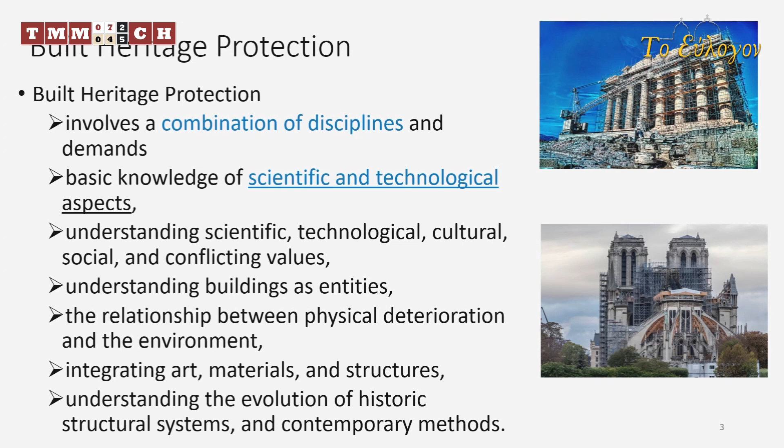Speaking about principles, I'm not going to present the whole Charter of Athens and Venice and its evolution, but one has to point out the importance of compatibility, which concerns not only the materials with the existing ones, but as well the structure itself, and has a lot of parameters, and reverse engineering to performative materials.

So we learn from what we find, and then we design materials and interventions that are compatible. We need to evaluate the restoration materials' compatibility, but not only compatibility, but as well as their durability and longevity.

Another point much discussed in our work is the principle of reversibility, used very much in the past. Now, after many years, the tendency is that this term is completed by another term, which is retreatability. This means that when an intervention or material is not possible to be reversible, it has to be compatible in such a way that it will permit future generations to retreat the surface or the structure—reinterventionality, as Professor Tassios says.

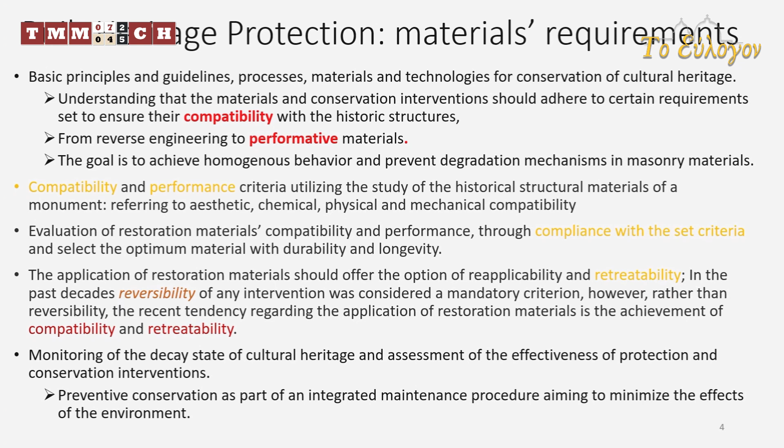Another point is the monitoring of the decay state of cultural heritage and the assessment of the effectiveness of interventions. We must not only apply interventions as materials, but judge them in the future and try to understand if finally they were good or not. And of course preventive conservation is very important in order to avoid important damage.

There is an open discussion about cultural materials and climate change, as we all know. I will not go through all the points Professor Maravelaki has noted, but we need to take this matter into account and make specific studies in various sites, because they are not the same—the situation with climate change in Peloponnese or North Greece or other countries differs. It's important to have data, and on the basis of this monitoring system data, to make workshops and training, making not only professionals but as well the public aware of this problem, which is a real problem for the monuments.

There is as well the question of artificial intelligence—there was a session this morning on this, which concerns restoration and conservation of monuments, because a lot of help can be given by this approach regarding image recognition and pattern detection. It may assist experts in preserving sensitive artworks and archaeological items, and contributes to the protection of cultural heritage sites by addressing physical effects through environmental monitoring.

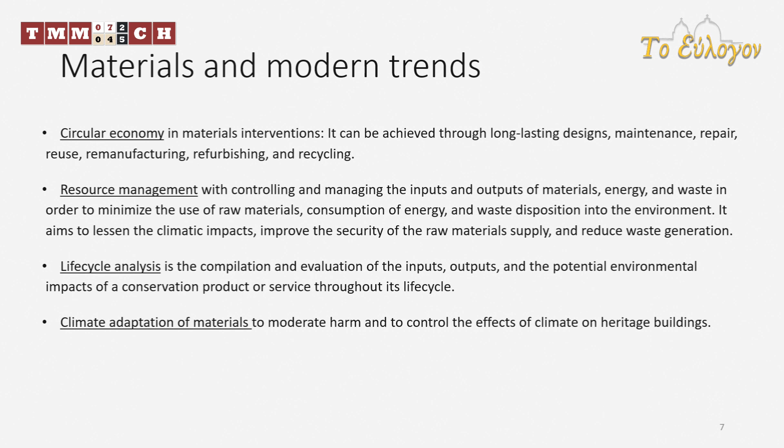For future work, we have some proposals from Noni Maravelaki: integrating new artificial intelligence systems developed in research projects into existing systems, publicly sharing and generalizing models trained on cultural heritage collections, implementing artificial intelligence in a way that is considerate of ethical, legal, and social aspects, reducing the carbon footprint of training models and processing at scale. I would like to add to these proposals that we also have to try to prepare in a way that will reach all the professionals with the knowledge we already gained.

So we need some regulatory documents, both regarding materials, because we know a lot of things, and regarding the structures as well. And finally, as we embark on this transformative journey, it is crucial to continue fostering interdisciplinary collaborations and community engagement to ensure the effective and responsible preservation of our shared cultural heritage. Thank you.

So we will discuss protective coatings and the desired general properties of protective coatings. Protective coatings must produce hydrophobicity, breathing of the substrate, resistance to environmental factors, preservation of protective properties, no alteration of the optical properties of the stone. The application of the coating should be a reversible process, and it must be compatible.

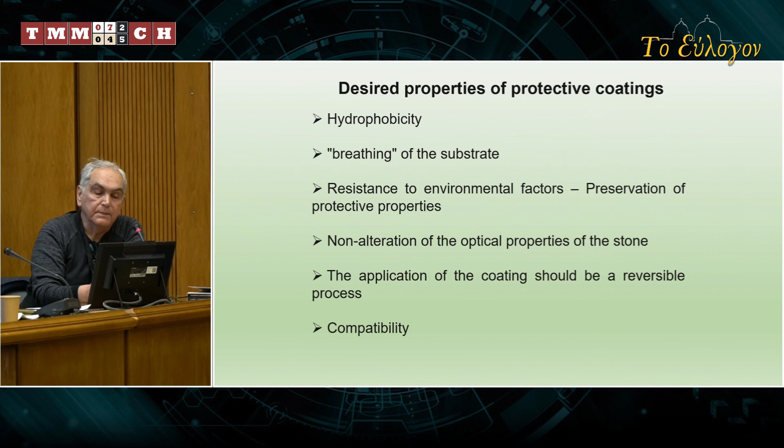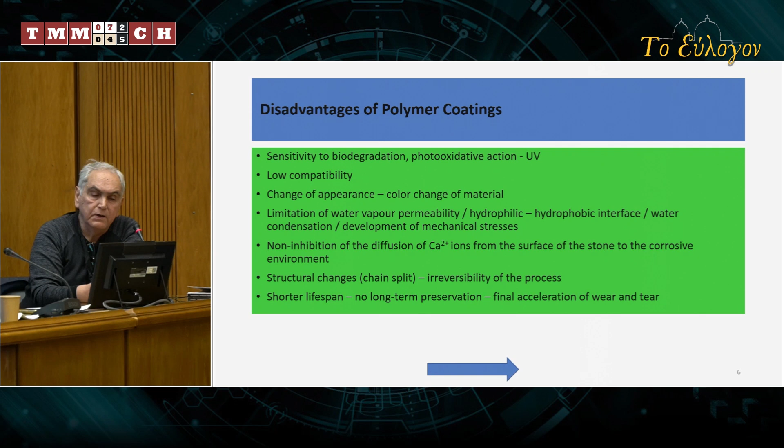Starting with polymeric coatings - the disadvantages of polymeric coatings include sensitivity to biodegradation, photooxidation from UV action, low compatibility, change of appearance and color change of material, limitation of water vapor permeability, a hydrophilic-hydrophobic interface causing water condensation, and development of mechanical stresses. There's no inhibition of the diffusion of calcium ions from the surface of the stone to the corrosive environment, structural changes, irreversibility of the process, shorter lifespan, no long-term preservation, and final acceleration of wear and tear.

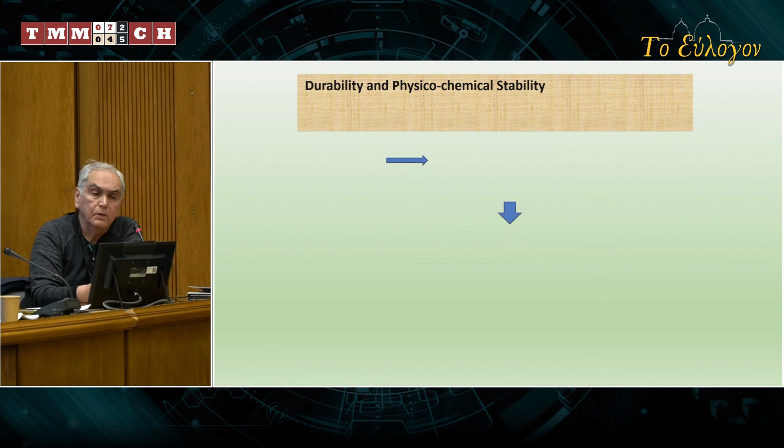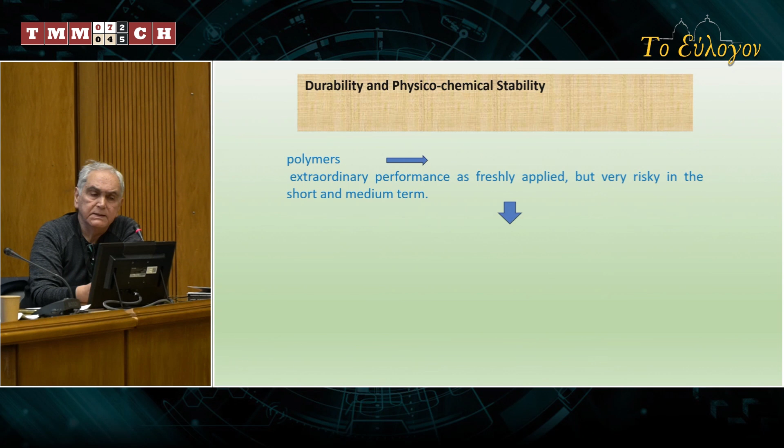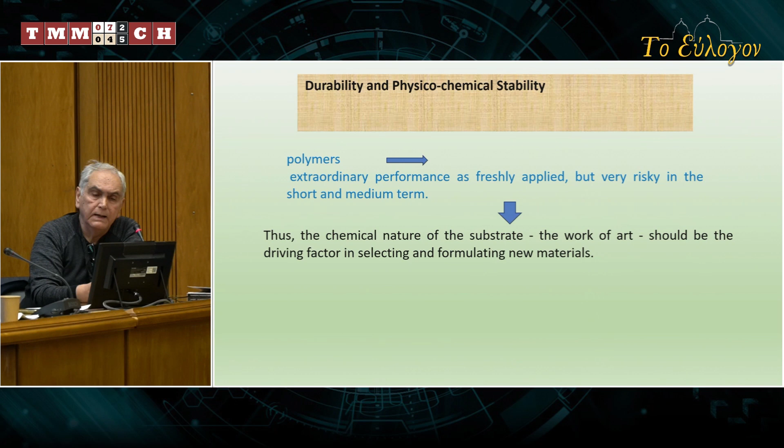Now we go on with durability and physicochemical stability. Polymers show extraordinary performance when freshly applied, but are very risky in the short and medium term. Thus, the chemical nature of the substrate, the work of art, should be the driving factor in selecting and formulating new materials. Art-compatible materials need to match the properties of the materials constituting the works of art.

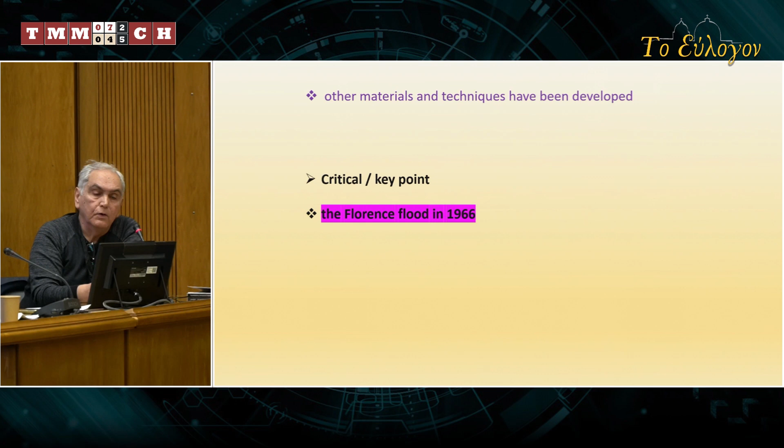Other materials and techniques have been developed. An important, though not the only, critical key point for all this development of methods and materials is the well-known Florence flood of '66. Also, a second point: material science, colloid science, and nanoscience play a fundamental role in the development of new art-compatible materials.

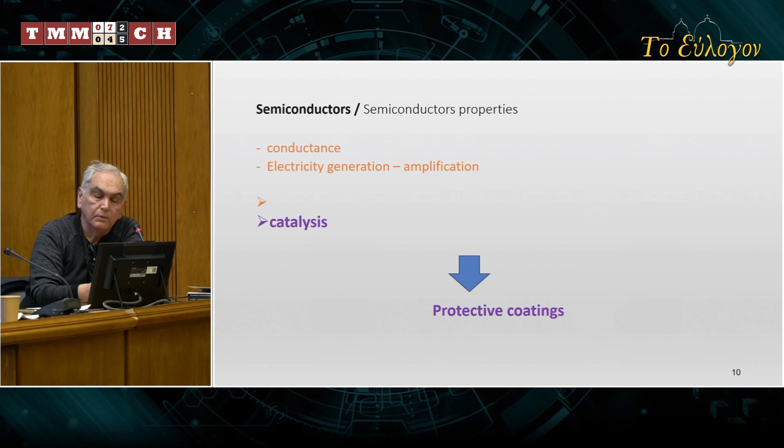Now we continue, after polymeric materials, to various other methods for the protection of building materials of monuments and works of art: the method of protection with N-semiconductors. It is well known, the catalytic properties of semiconductors, and what we have done is produce protective coatings where we add N-semiconductors to retard the donor reaction of oxidation, that means corrosion, so we achieve reaction retardation.

Here I have to say that we cannot discuss cultural heritage and conservation of monuments without a reference to the work of our teacher, Professor Skoulikidis, who has very important work in all these fields.

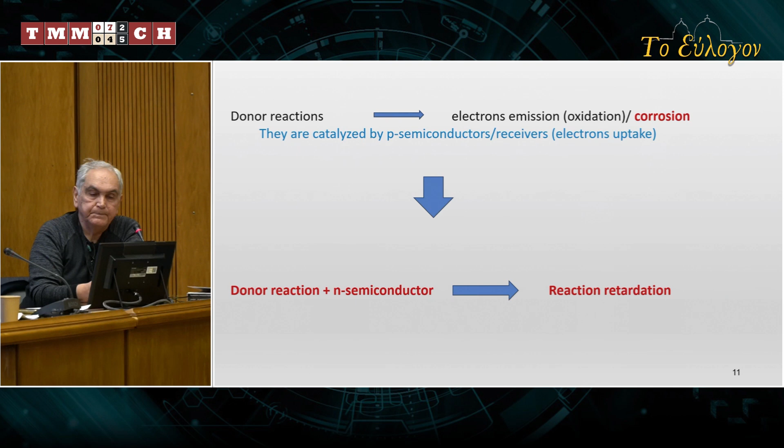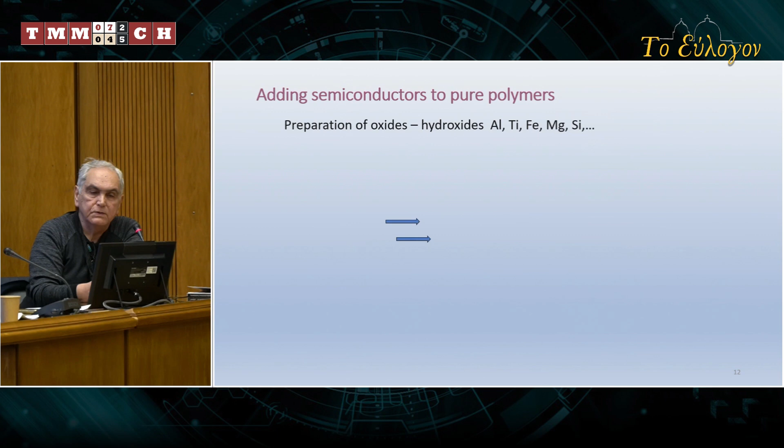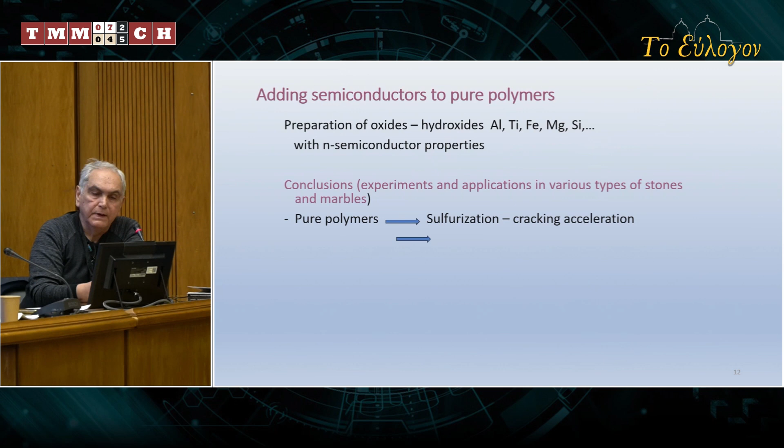Adding semiconductors to polymers means that we prepare oxides, hydroxides of various elements with N semiconductor properties, and so where we have with polymers sulfurization and cracking acceleration, with doped polymers we have protection, increased protection with increased semiconductivity, and protection from acid rain.

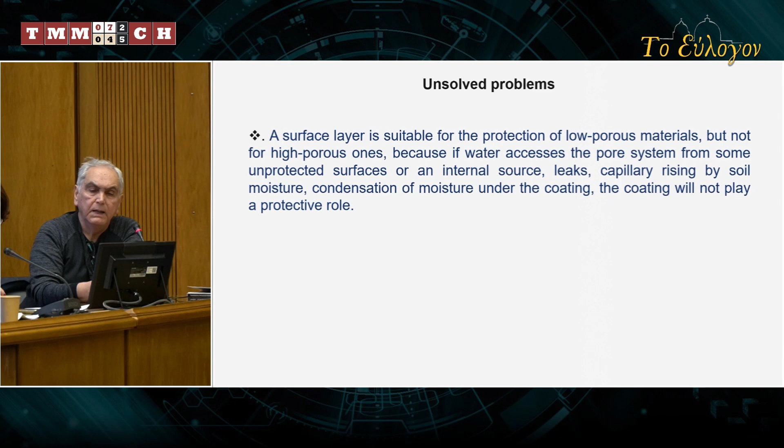Second method, hydrophobic protective coatings. A water repellent layer on the surface of the building material exerts an important protective effect as it does not allow water to penetrate the pores or cracks and cause damage. Unsolved problem: a surface layer is suitable for the protection of low pore material but not for highly porous ones, because if water accesses the pore system from some unprotected surface or an internal source, capillary rising by soil moisture, condensation of moisture under the coating will not play a protective role.

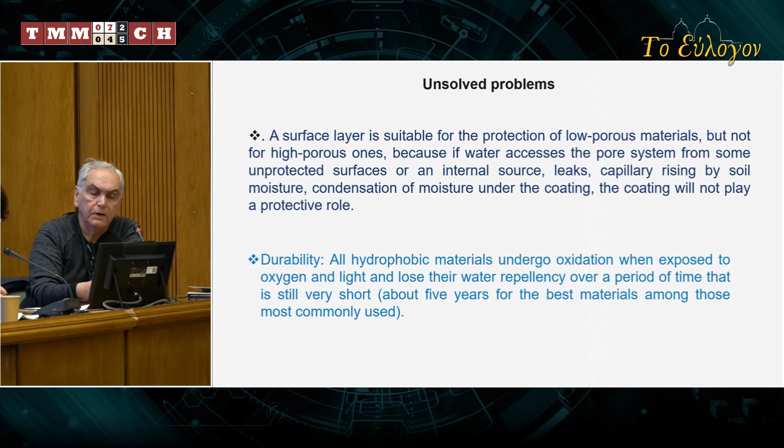And second, the durability. All hydrophobic materials undergo oxidation when exposed to oxygen and light and lose their water repellency over a period of time that is still very short, about 5 years for the best materials, until now.

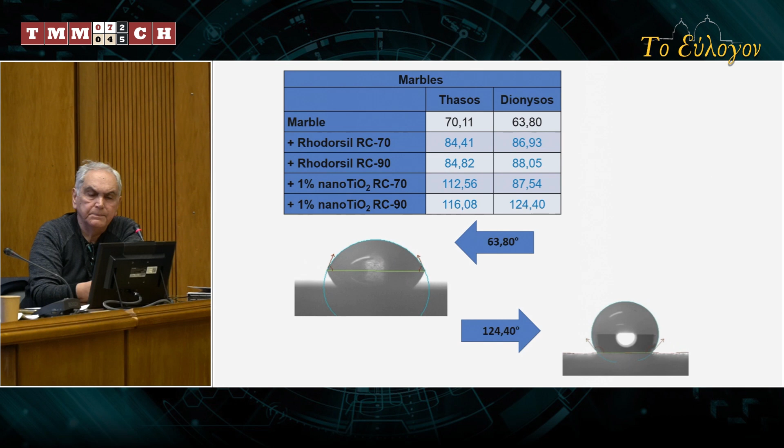Here we see some experimental results of our laboratory from various marbles, Thasos and Dionysos, and with various protective coatings, polymeric alkoxysilanes with nanocomposite, hydrophilic and hydrophobic.

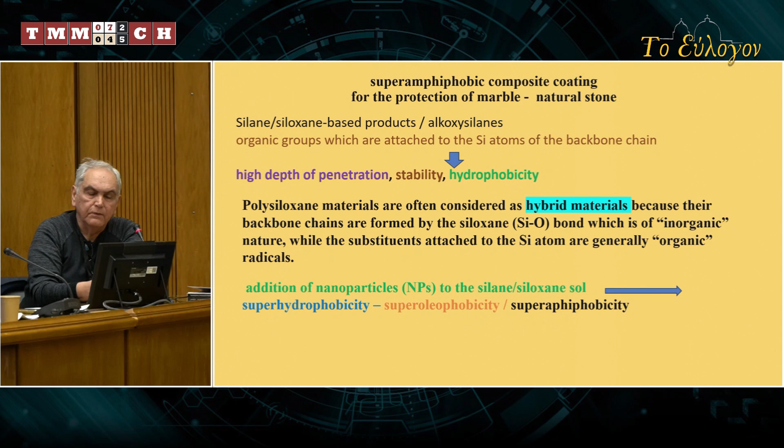And also we have a work about a superamphiphobic composite coating for the protection of natural marble stone made in our laboratory. We don't have enough time to see all of this. Polysiloxane material, hybrid material, superhydrophobicity, oleophobicity, superamphiphobicity was presented in a previous conference here.

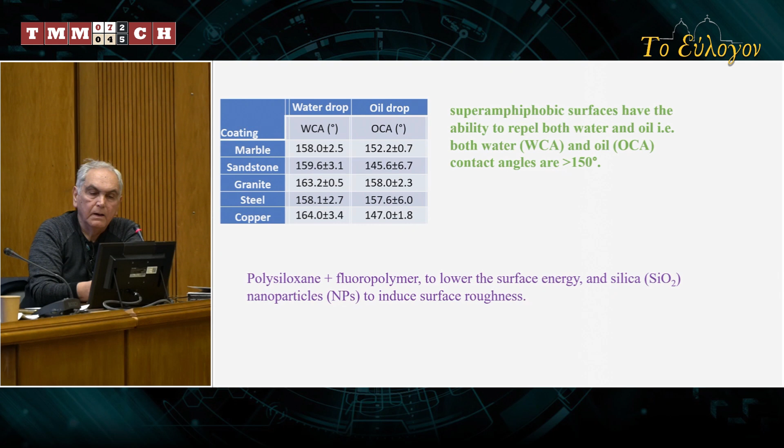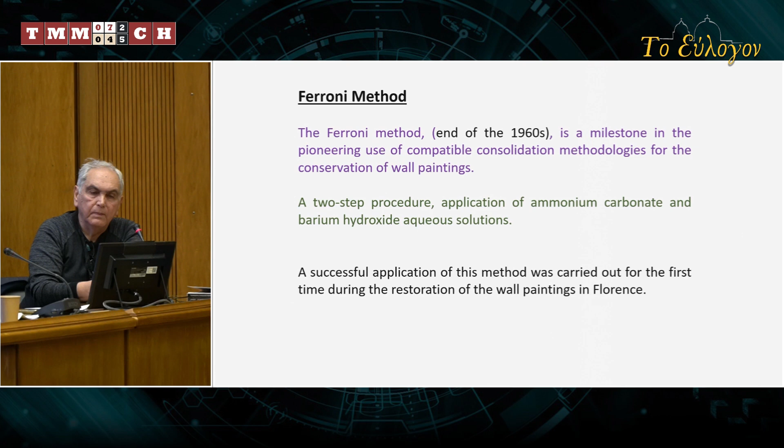Also inorganic nanomaterials for the consolidation of wall paintings and stone, the well-known Ferroni method, the milestone of pioneer use of compatible consolidants, calcium hydroxide, the first nanomaterial used in restoration. Factors that affect the performance of nanoparticles.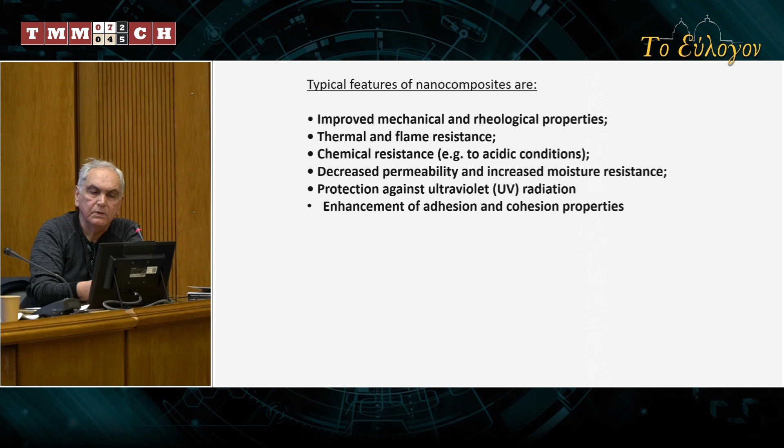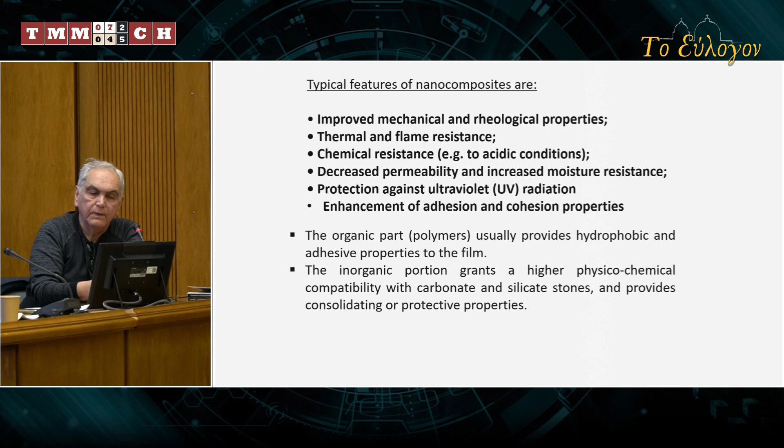And organic and inorganic hybrid nanocomposites. Typical features of nanocomposites: mechanical resistance, chemical resistance, decreased permeability, protection against ultraviolet radiation. The organic part usually provides hydrophobic and adhesive properties to the film. The inorganic portion grants a higher physicochemical compatibility with carbonate and silicate stones and provides consolidating or protective properties.

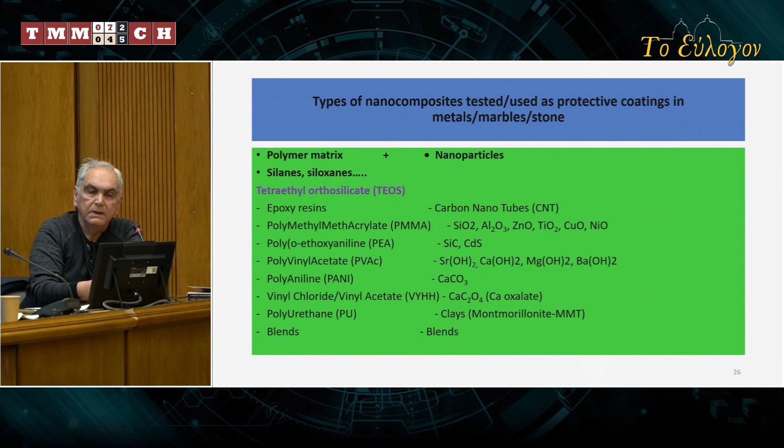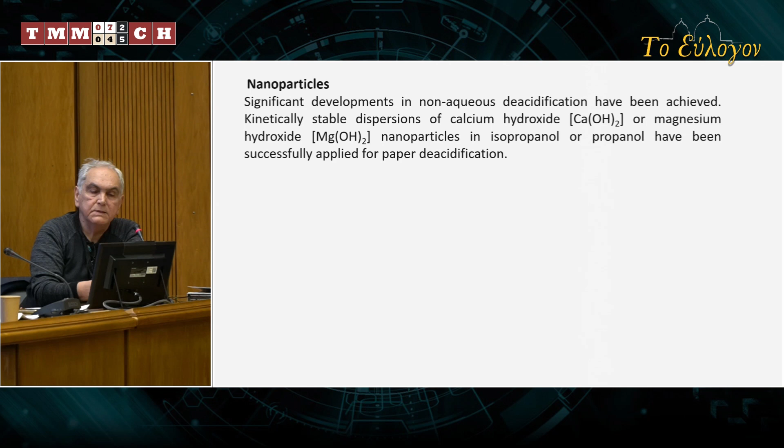Here, various kinds of nanocomposites tested as protective coatings on metals, marbles, or stone. Inorganic nanomaterials for the deacidification of paper also. Stable dispersions of calcium hydroxide or magnesium hydroxide nanoparticles for the deacidification of paper.

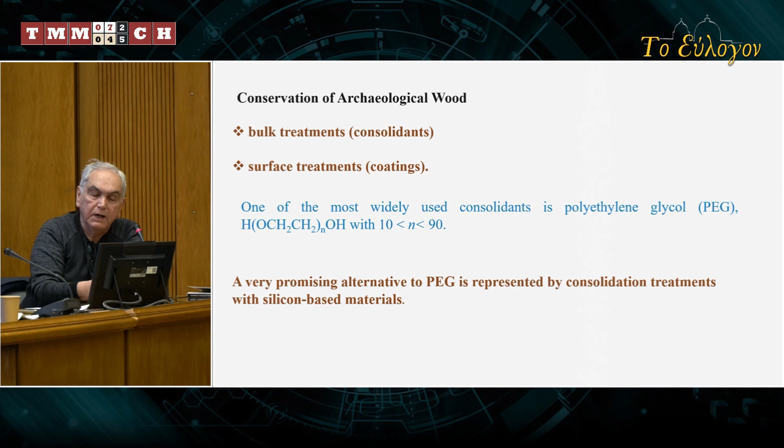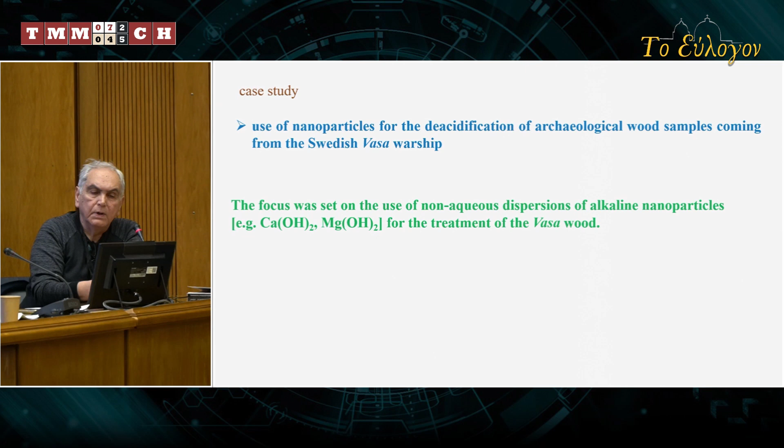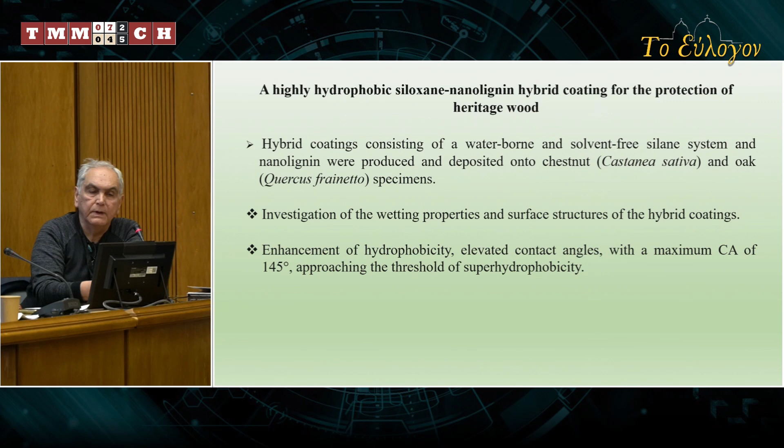And also inorganic nanomaterials for the deacidification of waterlogged wood, an application for consolidation treatments with silicon-based materials, sol-gel techniques, and also work made in our laboratory. This work will be presented this afternoon here by one collaborator of our laboratory: highly hydrophobic siloxane-nanolignin hybrid coating for the protection of heritage wood.

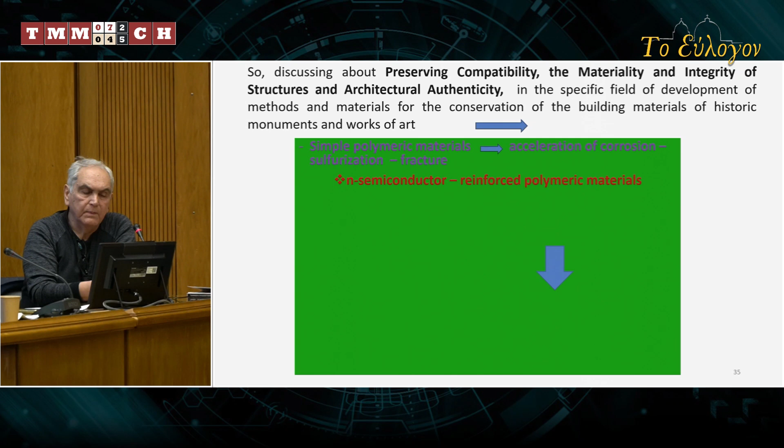So, we have that. With polymeric materials, we have acceleration of corrosion, sulfurization, fracture, and after we have the methods: materials with N semiconductors, reinforced polymer materials, inorganic nanomaterials, hydrophobic materials, hybrid nanocomposite materials, and what else in the future. And we have enhancements of mechanical, anti-corrosion and antioxidant properties.

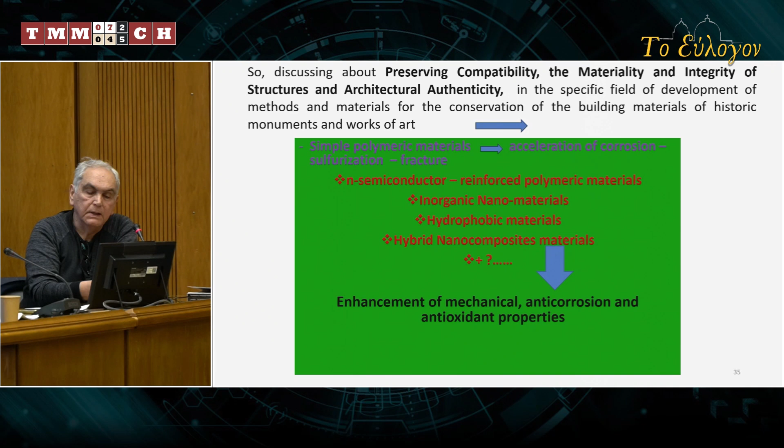And closing, working to prepare a new generation of researchers in the fields of preservation of cultural heritage, we have organized, for more than 10 years, and we continue, a transnational master course program. We have every year about 25 students, selected from about 200 applications from many countries from all the world. And this archaeological materials program is an integrated master program, University of Évora, University of Thessaloniki, and Sapienza Rome University, with many other associated members and partners from all Europe and not only.

Thank you very much. I was out of time. You were a bit out of time, but very inclusive. Thank you.

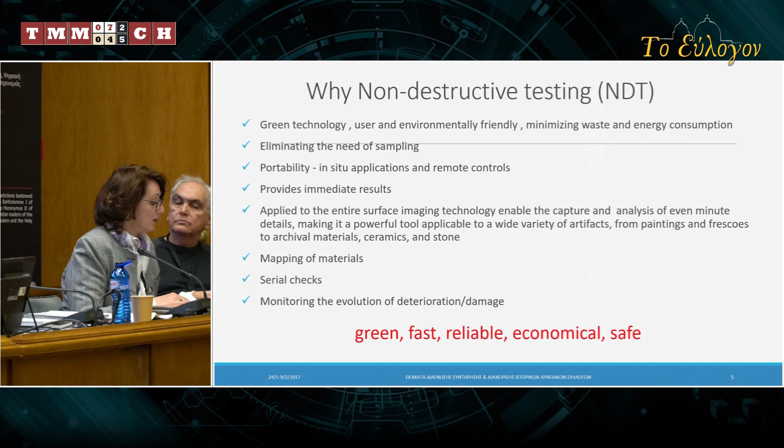Speaking about the Green Art project implemented in the framework of Horizon 2021, I want to emphasize the importance of Greece's participation in the proposed European Partnership for Resilient Cultural Heritage under Horizon Europe. This initiative is a co-funded European partnership between national and regional research and innovation funding agencies, governmental organizations, ministries, social partners, and employment, education, research, and innovation institutions. It aims to strengthen the preservation of Europe's cultural heritage, contribute to climate neutrality, and foster innovation through interdisciplinary research, which is at the core of modern scientific work.

However, Greece's participation is not guaranteed, while funding opportunities are limited to participating countries. Greece, with its invaluable cultural heritage, faces severe impacts from climate change. There is a special panel on this issue within this conference, showing the importance of this matter. Participating in this international partnership would provide Greece with the opportunity to collaborate with other regions and organizations developing and implementing innovative solutions, models, and strategies to protect and preserve our cultural heritage in the context of the United Nations Sustainable Development Goals and EU policies on green and digital transition, societal inclusion, and resilience.

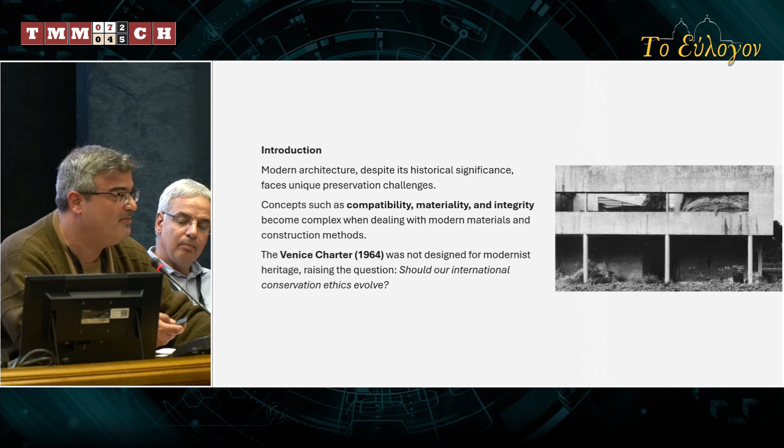There are some key challenges that we may point out. The first one would have to do with materiality and structural integrity. Modern materials such as reinforced concrete, early plastics, experimental architectural finishes degrade differently and require interventions that challenge authenticity. They have to be replaced most of the times.

Compatibility and sustainability. Many modern buildings were not designed for longevity, they were not monumental in their intention, and they were not energy efficient according to the way we define this today. So how do we balance preservation with the need for sustainable performance?

And the idea of adaptive reuse, highlighted by DOCOMOMO, the international body focusing on documenting and protecting modernist architecture, which was deeply function-oriented from its conception. Unlike monuments of the past, its very essence is tied to the idea of function and adaptability. Sustainable management must focus not only on material conservation, but also on ensuring that these structures continue to serve a purpose in contemporary society.

I will very briefly present some case studies which I think provide us with an array of the issues we have to deal with. The first one is the Bauhaus building in Dessau, Germany. Originally, of course, designed by Walter Gropius, constructed between 25 and 26. And the background of the story, we all know, it has to do with the Bauhaus school moving to Dessau in 1925, where this iconic building was constructed by Gropius as an expression of functional modernist principles.

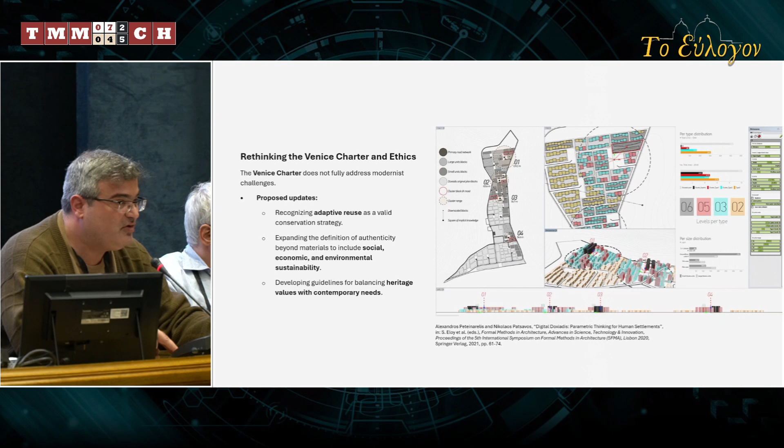And moving to the last example, the Venice Charter, which does not fully address modernist challenges, we may propose some updates: recognizing adaptive reuse as a valid conservation strategy, expanding the definition of authenticity beyond materials to include social, economic, and environmental sustainability, developing guidelines for balancing heritage values with contemporary needs and cultural values.

Modern architectural heritage is fragile yet vital. Most modernist buildings were both experimental and non-monumental. We need a revised, if not innovative, toolkit of concepts, methods, and techniques. Balancing authenticity with functionality and sustainability is crucial.

Sustainable management of modern architecture must focus primarily on the new function and the original function of the buildings, because maybe, in a way, trying to preserve their architectural essence would also need some kind of new function, which is a reinterpretation of the original one, because this was central in the concept of the building. In a way, if you spare its functions, there is no building left.

Updating international guidelines is necessary, and we need to acknowledge especially the role of social, economic, and environmental sustainability. We need to invest a lot in public awareness and acceptance, because there is a serious lack on that level regarding modernist heritage. Their historical and aesthetic, if not any other values, are not easily recognizable by the public.

Modern heritage is, of course, still a paradox, or maybe just in transition. The decisions we make today will shape whether these buildings survive as a testament to modernism's ideals and achievements or fade into obscurity. Thank you.

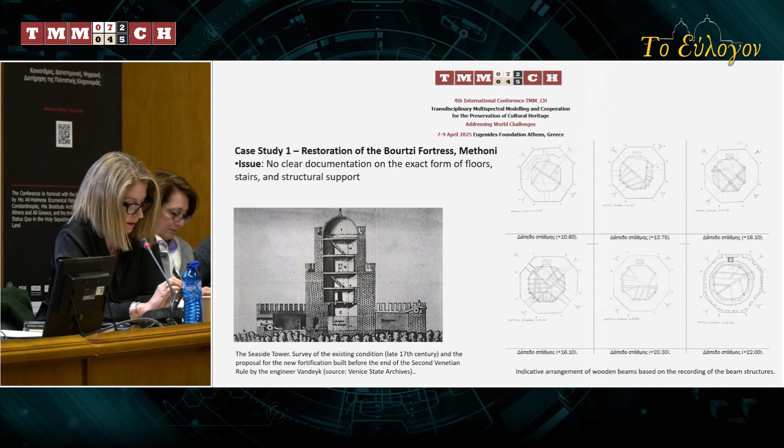After examining all available data, I decided to propose a solution that would restore the access path to the monument, as this path was essential for modern accessibility and for the function of the monument as an archaeological site. The solution partially restored the levels of the floors while being self-supporting and reversible and constructed from new metal materials. The advantages of this chosen solution were the restoration of access, accurate documentation of floor levels, avoidance of misleading reconstruction, and being self-supporting and reversible. This approach reflects the principles outlined in Article 9 of the Venice Charter, where differentiation, reversibility, and restoration up to the point of certainty were emphasized.

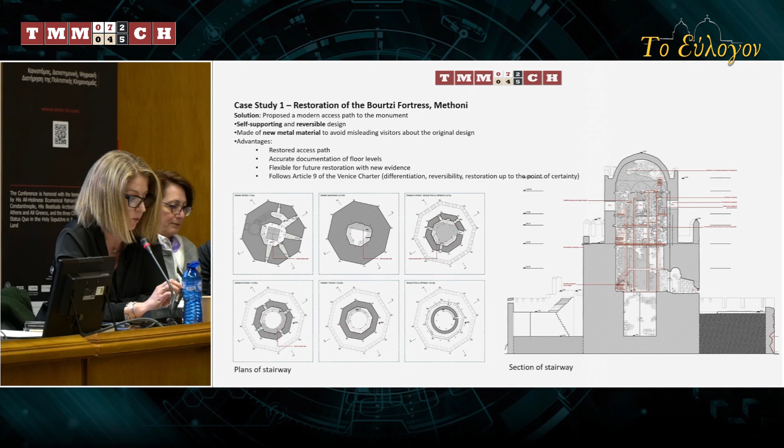Balancing monument preservation and modern needs. One of the major challenges in preserving authenticity arises when monuments remain in use. In such cases, the needs of modern users often conflict with the preservation of the architectural authenticity of the monument. In my study of the conservation and energy upgrade of the listed Aeginiteio Hospital, a significant challenge was finding a balance between the monument's preservation and its contemporary use. The original wooden windows were mainly double-leaf with casement, but many had been replaced with aluminum windows that did not match the original design. These replacements served modern standards for treating mentally ill patients, but altered the monument's authenticity.

Similarly, at the Governor's Palace in Rhodes, there are unique windows with artistic and architectural value. However, maintaining these windows created problems with the required energy upgrade. In both cases, the users demanded the replacement of the original windows with materials and design that met modern needs. To address the conflicting needs, I propose the following. At Aeginiteio Hospital, preservation of the original window design at the front building on Vasilissis Sofias Street, while adapting the windows in the other buildings to modern needs. At the Governor's Palace in Rhodes, the windows with particular artistic value will be preserved, while the common design windows will be replaced with new wooden windows that meet energy-efficient specifications, thus retaining the form but not the original material.

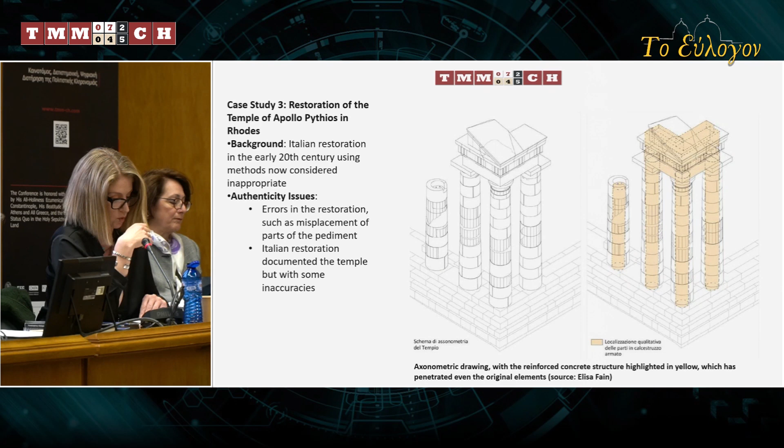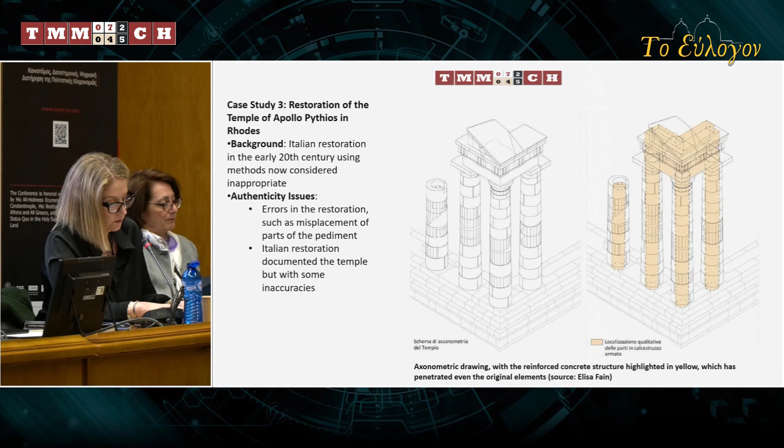Addressing authenticity challenges and restoration techniques. The Temple of Apollo Pythios in Rhodes, an emblematic monument of the island, was restored by the Italians in the early 20th century using methods that are now considered unacceptable. Concrete was used in the trunk and beams of the monument, a practice common at the time, not only by the Italians, but also by Greek restorers. The temple, as it stands today, despite being more didactic in nature, represents a reconstruction of only the northeastern corner. This form has become ingrained in the collective memory. While the Italian restoration contained errors, the intention was to recreate the temple in a way that made it comprehensible in three dimensions.

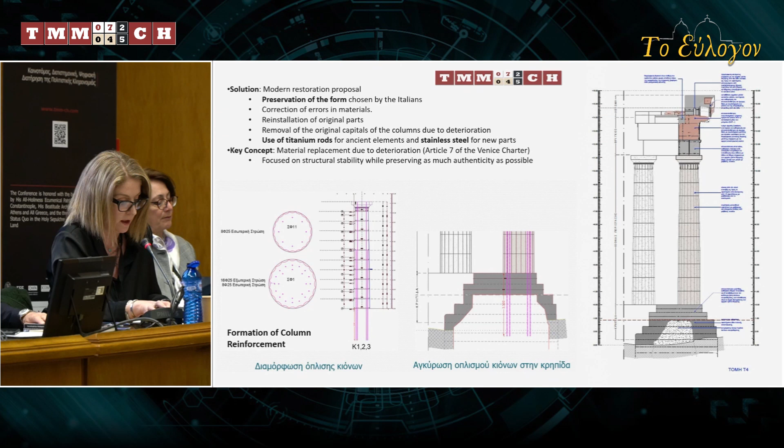The contemporary restoration plan preserves the restoration choices made by the Italians, with corrections regarding material use and the protection of original elements, the proper reinstallation of authentic parts, and partial additions to present a more complete form of the monument. The modern approach involves careful use of materials to rectify the mistakes of the past, ensuring the protection and preservation of original components.

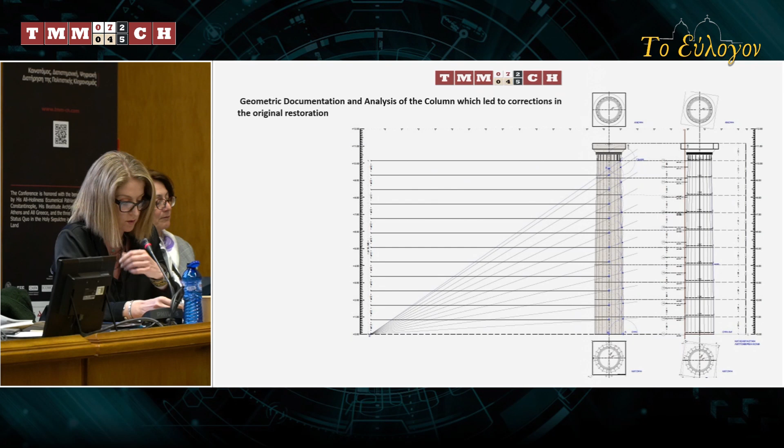Due to the deterioration of the original material, some parts of the monument need to be removed and replaced with new, similar material. To achieve structural stabilization, connections between original and new elements are reinforced with titanium rods for the ancient parts and stainless steel for the new parts. This ensures the monument's integrity.

When a monument cannot be fully restored due to the deteriorated state of original materials, structural rehabilitation using new materials is a necessary solution. The aim is to maintain the monument's historical and architectural integrity while ensuring its future stability. This case study illustrates that in monumental restoration, maintaining authenticity often involves a delicate balance between preserving original elements and using modern materials and techniques to ensure the monument's long-term viability. The integration of new materials like titanium and stainless steel, while respecting the historical structure, exemplifies a modern approach to balancing restoration with authenticity.

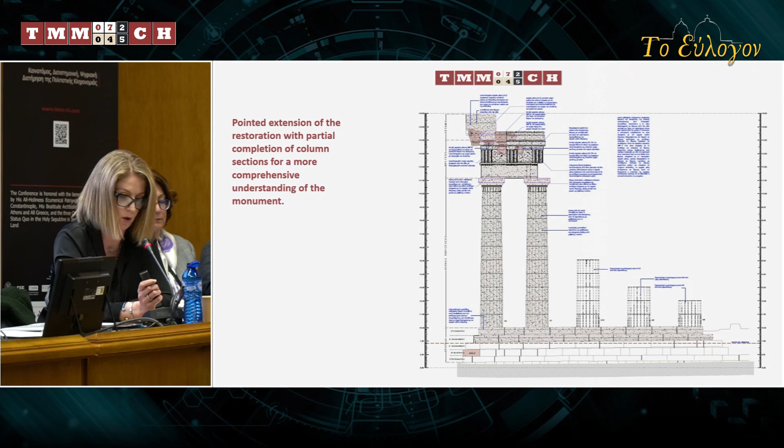Fourth case: addressing the controversy of relocating archaeological antiquities for the construction of a metro. The relocation of antiquities for the construction of the Venizelos metro station in Thessaloniki sparked significant debate and controversy. While it is clear that moving the antiquities impacted the authenticity of the monument, this was an unavoidable consequence. The challenge remains in balancing the preservation of heritage with the modern needs of urban development.

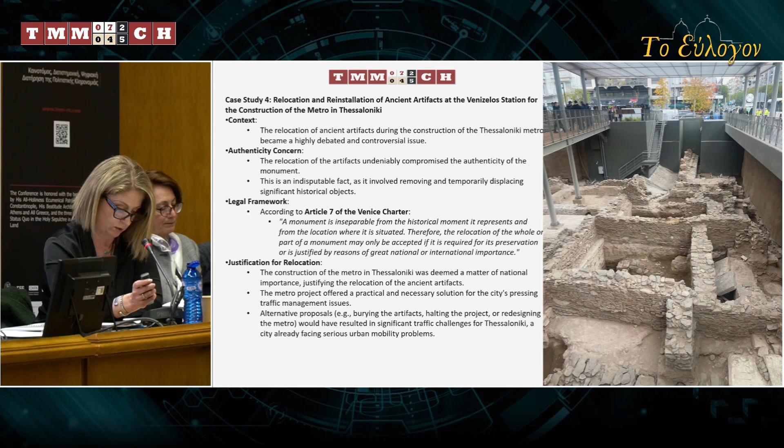Moving the antiquities undoubtedly harmed the monument's authenticity. The construction of the metro system in Thessaloniki, considering the city's needs today, is seen as a reason of national importance that justified the relocation of the antiquities. Alternative suggestions, such as burying the artifacts, halting the project, or redesigning the construction, would have led to significant traffic management issues for Thessaloniki, making this modern city uninhabitable.

While a certain degree of authenticity was sacrificed, the benefits of the project, particularly in terms of public education, urban development, and improved transportation, outweigh the costs in my opinion. The creation of an open-air museum that allows for public engagement with these ancient artifacts presents a significant cultural gain for Thessaloniki, making the trade-off between preservation and progress more acceptable.

In conclusion, we find that factors such as the preservation of the monument, its historical significance, modern needs, and the degree of documentation significantly influence the extent of intervention concerning the preservation of architectural authenticity. As researchers, in my opinion, we must ensure this authenticity without being rigidly fixated on it, disregarding other parameters such as the integration and function of the monument in modern life.

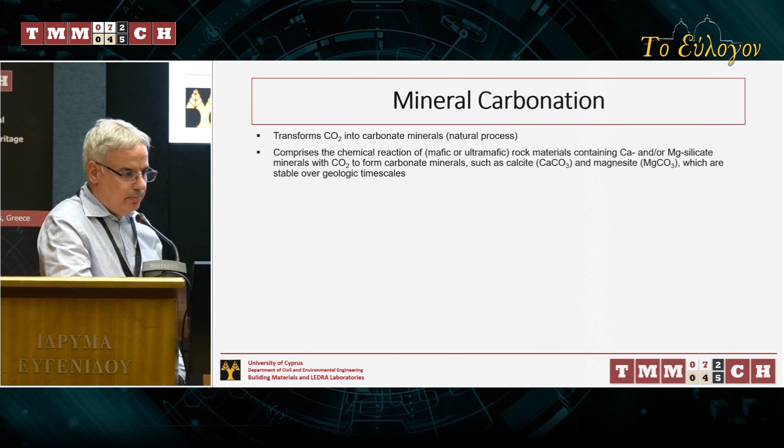One way of addressing this issue is to look into mineral carbonation. This is a natural way of transforming CO2 into carbonate minerals. It essentially comprises the chemical reaction of either mafic or ultramafic rock materials containing calcium and/or magnesium silicate minerals with CO2 to produce stable carbonate minerals such as calcite and magnesite.

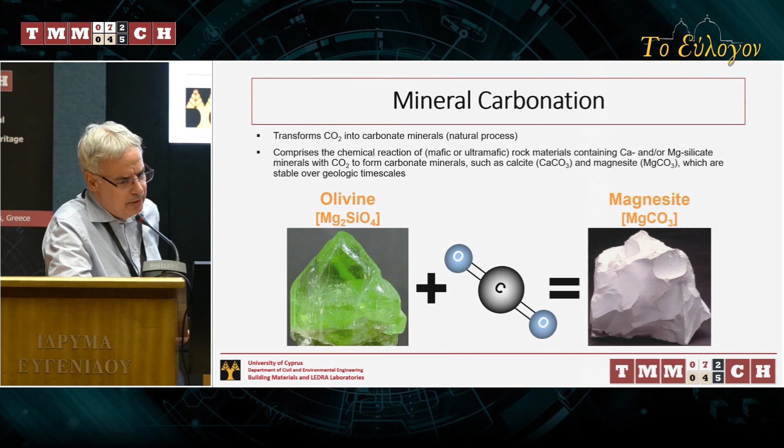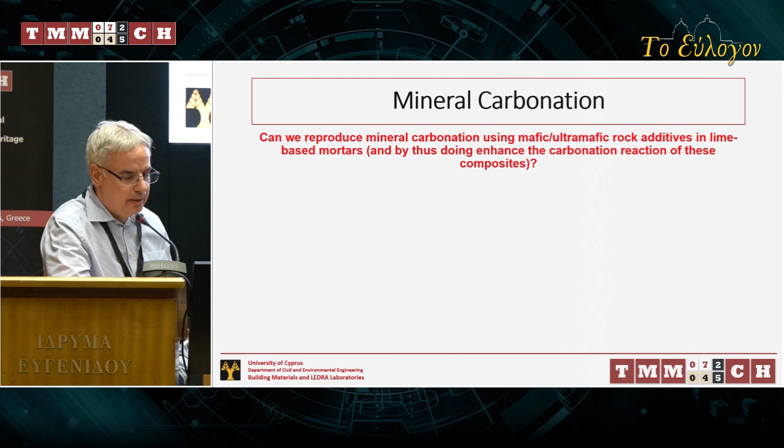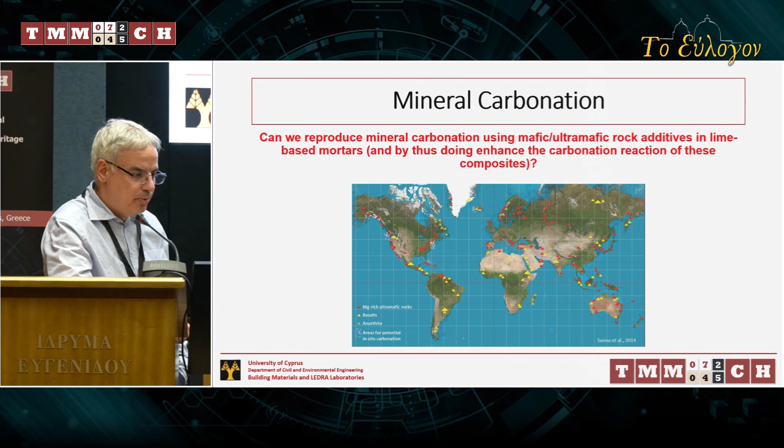So the challenge is whether we can reproduce this mineral carbonation, this natural reaction, using mafic or ultramafic rock additives in lime mortars, and by doing so enhance both the carbonation reaction of the mortars and their sustainability and energy efficiency. The good news is that we can find raw material suitable for mineral carbonation all over the world, including Cyprus, and I believe Greece as well.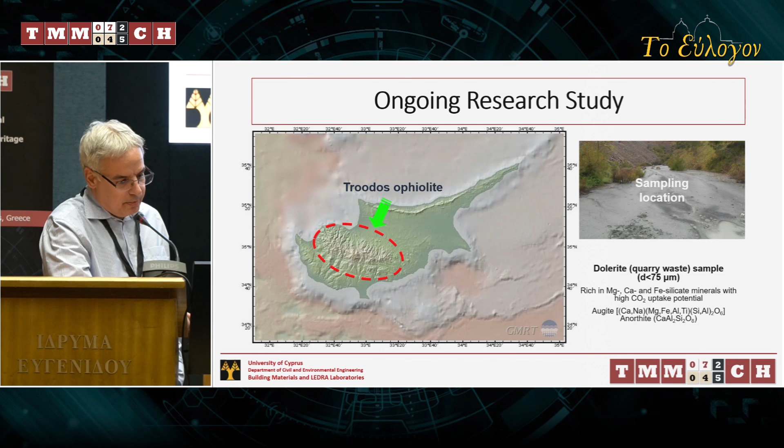In Cyprus, we find these materials in the Troodos ophiolite region. What we usually do is look for the aggregate quarries located at the outskirts of the Troodos ophiolite, and it is from one of these quarries that we obtained one of our samples recently - a quarry waste material with particle size below 75 microns and with the right mineralogy, including minerals rich in magnesium, calcium, and iron silicate, suitable for sequestering CO2. These were minerals like augite and anorthite.

So we used this material in producing lime mortars, as a replacement to the lime binders, not as a replacement to the aggregate. And the results were quite interesting and quite promising.

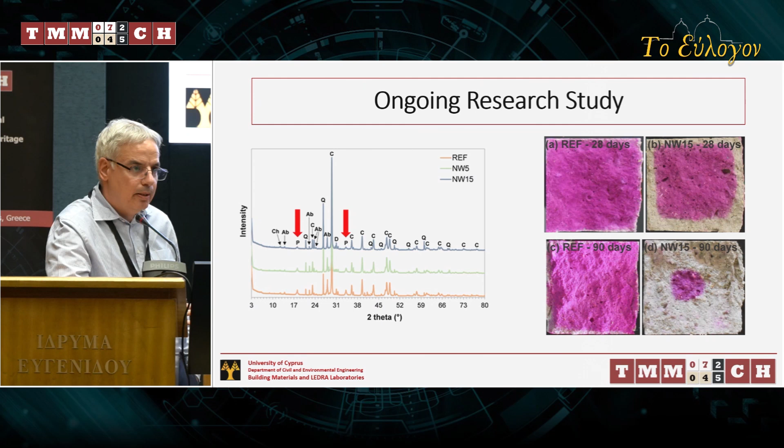We have shown that in the mix designs with the quarry waste additive, the intensity of the portlandite peaks was almost diminished. This was an indication that the additive actually reacted with portlandite to produce calcium carbonate. This was also confirmed by tests with phenolphthalein, by which the sample with the quarry waste additive was almost fully carbonated after 90 days, as opposed to the reference sample, which showed only slight evidence of carbonation - all this in natural conditions without any accelerated carbonation conditions.

We also carried out CO2 chemisorption followed by temperature programmed desorption experiments, which allow fast and accurate measurements of low amounts of CO2 uptake in a great variety of materials. Again, these tests confirm the potential of the mix design with the quarry waste additive to sequester greater amounts of CO2 compared to the reference sample.

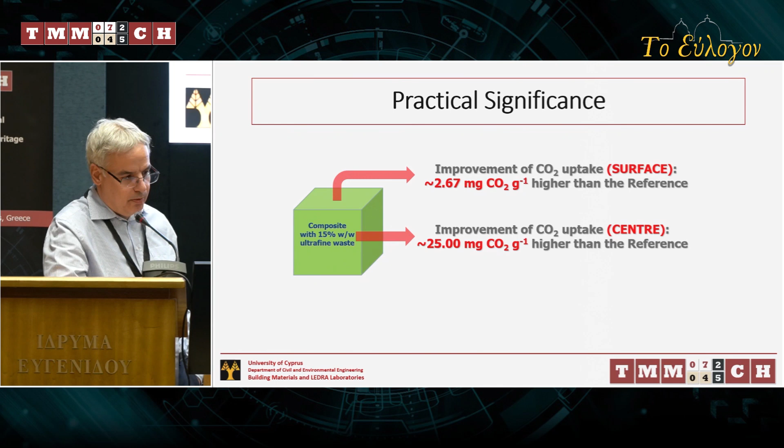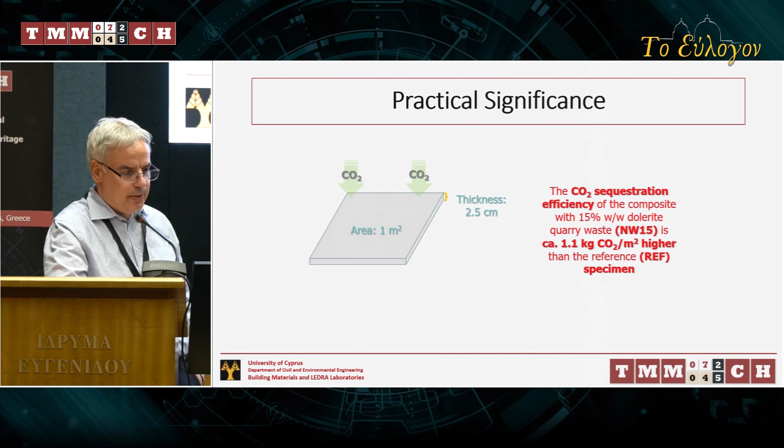Practically, this corresponded to an improvement in CO2 uptake at the center of the sample with the waste additive compared with the reference sample of approximately 25 milligrams per gram, compared to a mere 2.67 milligrams of CO2 per gram at the surface of the same sample. If we translate this into means of CO2 sequestration, this is roughly equivalent to an extra 1 kilogram of CO2 per square meter of render, supposing the thickness of the applied render is about 2.5 centimeters - again compared to the reference sample.

So to sum up, this work, which is pretty much ongoing, has combined the reuse and exploitation of a waste material - a quarry waste material - with the development of a novel, environmentally friendly building material with improved properties, which at the same time can also sequester or trap CO2, and by doing so can show its environmental friendliness. Thank you very much.

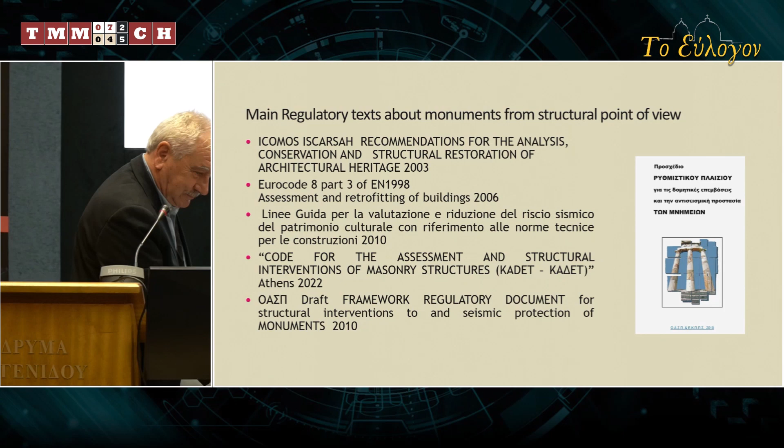With this very clear suggestion and conclusion, we can ask Professor Androniki Miltiadou-Fezans to do the reporting for all of us.

Thank you, Professor Patsavos. Of course, you may understand it's very difficult to sum up so many different matters that we heard in this panel. I will try to say some words that almost all of us have used. First of all, it was clear from all the speakers that there is a need for multidisciplinarity and collaboration. But I have to add, having worked on these matters for many years, that it is still not so evident that we have it in everyday case studies.

Sometimes some monuments are lucky enough to have a multidisciplinary approach. For others, due to the lack of personnel, we are struggling just to have at least a civil engineer and an architect. If we can also have some analysts and chemical engineers, this is very good. But of course, things have changed, this is good, we are on the right way. And we must fight every day to adopt this in our everyday life, not only in papers or in congresses. Multidisciplinarity is an everyday effort.